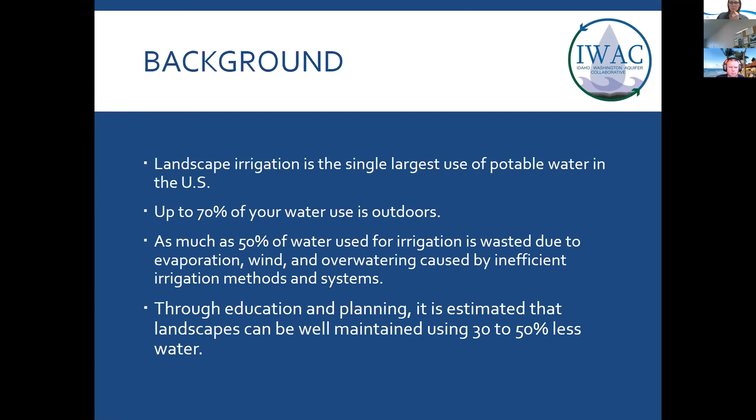There's a number of reasons that cause these green donuts, but primarily inefficient design or inefficient use of heads. Ideally, you want heads to spray head to head so you don't end up having these green donuts with dry spots in between, because what water managers will do is just go out and crank up the clock timer to try to keep those dry spots green.

And regardless of how much you punch the up button on that clock timer, if your system is incapable of reaching those dry areas, you're not going to get green. So just some very illustrative examples of what we see here. Plugging of heads or pressure issues can also contribute to these green donut features.

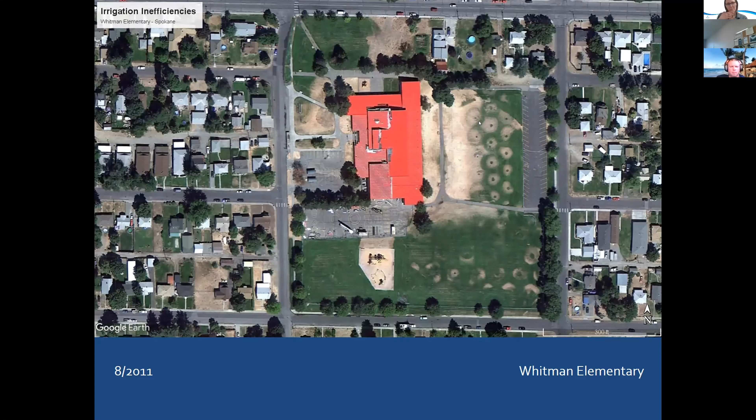Whitman Elementary School in Spokane. This landscape's got very good efficiency in the bottom left-hand corner, moderate efficiency in the bottom right-hand corner, but in the center up by the red roof school it's just totally brown. So I don't know if those zones are just not working, or, in particular between that and the parking lot, half of it's working with green and brown donuts and the other half's totally dead. So these are some of the things we're talking about in terms of not just system inefficiency and design, but also system maintenance and upkeep.

So what are some of the inefficiencies from design? Some of these I'd already pointed out in the photographs, but proper head spacing: ideally they're designed to be placed so they spray head to head and at proper distances, as well as head selection. You want to put heads where they're not going to get blocked, and this isn't always possible, but you don't want them blocked by fences, light posts, etc.

Proper head height can contribute to some of these brown and green donuts. If you haven't got the proper head height and they're buried down, you're going to see that very distinct green close to the head, but then a space of brown before it gets to the green part of the donut.

Proper head application. It seems intuitive, but I see it all the time where you have a 15-foot spray head in a 6-foot space and it just oversprays the area that's needed. Typically people break a head, go to Home Depot, grab one that looks like it off the shelf, and don't realize they're actually designed to spray a certain distance. So they need to select a larger or shorter spray for that distance.

Improper nozzle applications, whether you're using fine mist, large droplets, or a breakup. Like I mentioned earlier, if you don't have that breakup, it's just going to spray out of there like a stream, not get broken up, and not get to the landscape at all.

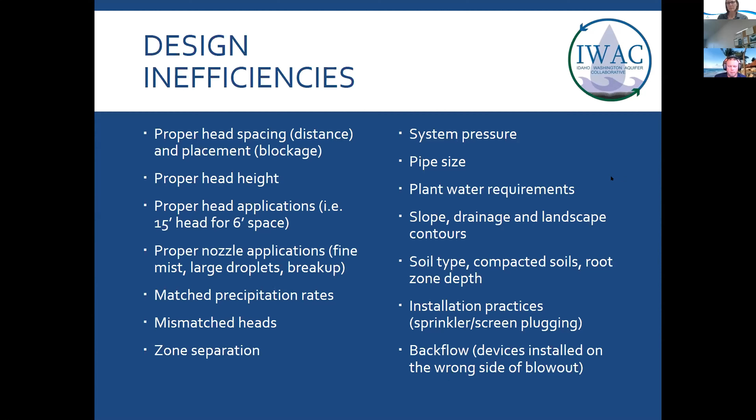Installation practices: obviously you want to keep your sprinklers and your screens free of debris when you're installing this equipment. And then also backflow devices, which we see quite frequently installed on the wrong side of the blowout or not at all.

So the maintenance inefficiencies, some of these kind of play into the other ones I just talked about, but misdirected spray: you're spraying it where it's not intended to, so you're not maintaining the degree of arc that you want on that spray. If you only want it to spray 90 degrees and it ends up spraying 180, well, that's misdirected spray.

Broken risers and heads, leaking seals on some of the sprinkler heads will really contribute to loss of volume to get the water out where you need it to. Plugged nozzles and screens, like I said, block spray. Tilted heads: a lot of times mowers will hit heads and tilt them either forward or backward. That's not going to get you the proper angle in order to achieve that head-to-head spraying that you intend. Head height I'd mentioned previously.

And then a lot of the inefficiencies that we see with regards to maintenance is we promote nighttime watering. Well, that's awesome, and that's what we should be promoting, but you also need to check your system regularly, because if it were running at 10 in the morning every day, you would probably see it running and you would be able to catch some of these maintenance inefficiencies. But the fact that we have it set at night, you don't see it.

So it's really important that you check it periodically and run it for a minute per zone to make sure that you didn't hit it with a mower and tilt the head or break the head. A lot of times they're not caught until the homeowner sees a big brown spot and asks, why is that brown? Well, you got a broken head and it's been broken for a month or more.

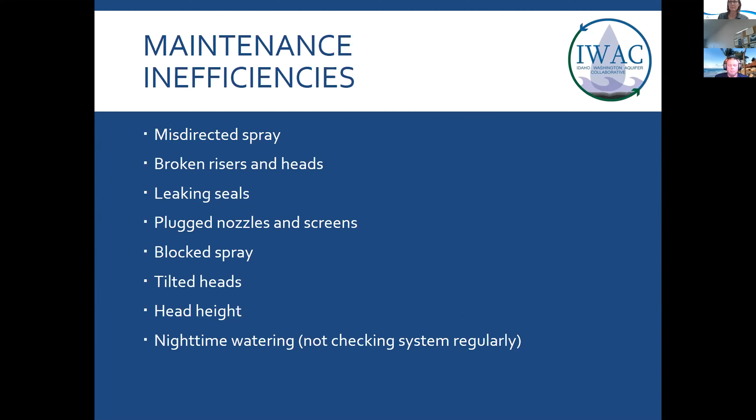And then also there's inefficiencies with regards to system operation. Set proper scheduling. Typically what we see is people water in a box. And what I mean by that is you start it in April and you end it in October and you don't ever touch the timer. So you're kind of watering in that box, you never change it.

Plant water requirements aren't like a box. The plant doesn't need a lot of water in April. It needs a lot of water in July. And plants also don't need a lot of water in October. So you really need to water more along a bell curve as opposed to in a box.

Start time is important. Obviously, you don't want to be running these systems in the heat of the day. Ideally, early morning, late evening, at night are ideal run start times. Run times are important, in particular if you can cycle soak.

And so if you want to get 30 minutes on a zone, for instance, don't just run that zone for 30 minutes because you're going to just get saturation and it's going to run off. You want to break that into cycle soak programs so you can do it into two run times of 15 minutes each on that zone, if that's what you want to get 30 minutes. That way it has a chance to get water and then soak into the roots, and then you apply a little bit more water.

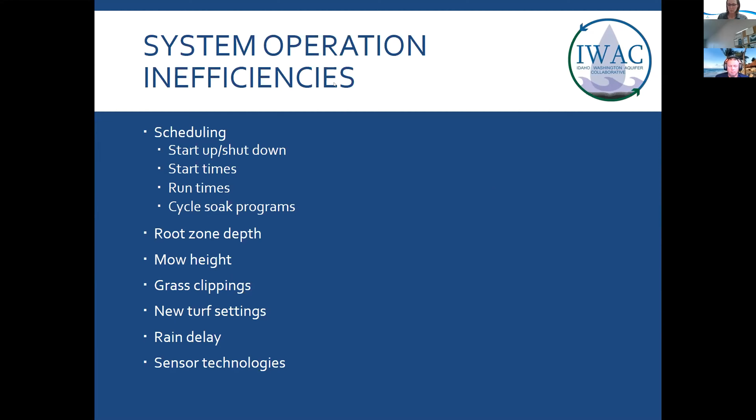Oh, I'll pause here and let the questions.

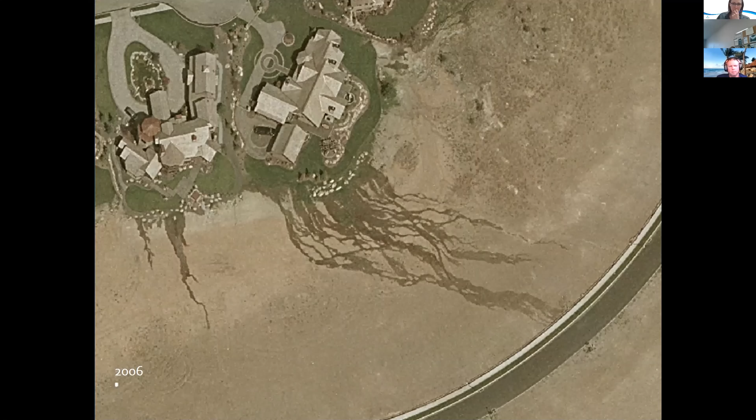Here's another excellent illustration. This is in Liberty Lake up on Legacy Ridge when they were first built in 2006, where they were irrigating these landscapes and had significant runoff from over irrigation. Broken heads that are either caught or ignored, that ended up running all the way down the parking lot and into the stormwater swale on the other side of the parking lot.

Cars are parked on top of it, dripping oil. That water carries the oil, just like stormwater. So these are things to do. Landscape managers need to correct these inefficiencies.

So I want to highlight the importance of this term called distribution uniformity. And distribution uniformity is thought of just like a percentage, kind of like a grade percentage if you were going to get one in class. Most systems are typically right around, and it's pretty poor, but it's truth, about 50% distribution uniformity.

So what that really means is if your plant, i.e. your turf, we promote this 1 inch of water a week type of education that's been out on the books for decades. But if you say we want 1 inch of water a week on our landscape and your system is only 50% efficient, well, you're going to have to irrigate that landscape and get 2 inches of water on that landscape in order to meet that requirement.

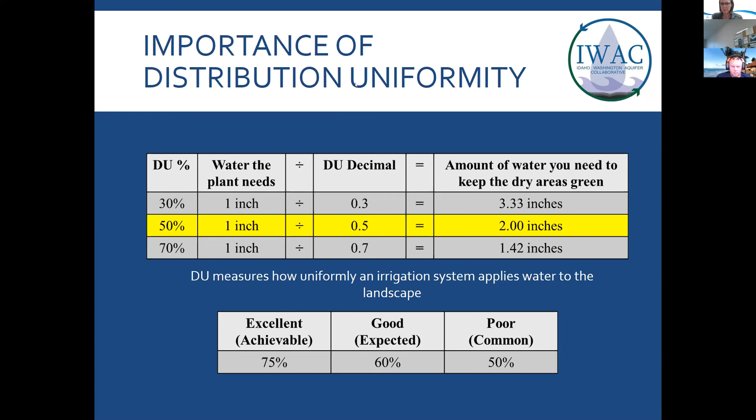But the way the distribution uniformity is measured is basically you perform an irrigation audit on the landscape, and you place cups at and between all of the irrigation heads across the landscape. And then you run the zone for a period of time, and then you measure the volume of water that is captured in these cups. And then you put that into a spreadsheet and you end up calculating distribution uniformity across that landscape.

But different types of heads have different efficiencies as well. Obviously, the most efficient type of irrigation system is a subsurface drip irrigation system. Those are 90% efficient. We also have micro irrigation systems that are 85% that have little drip emitters on them. Those are pretty common. You send this little drip emitter to the shrub that you want to water, etc. Then you have large rotors next, 70% efficient. That's why you see the golf courses have very high distribution uniformity, because they're properly designed and they're using large rotors. Small rotors are 65% efficient, and these little pop-up spray heads are 50% efficient.

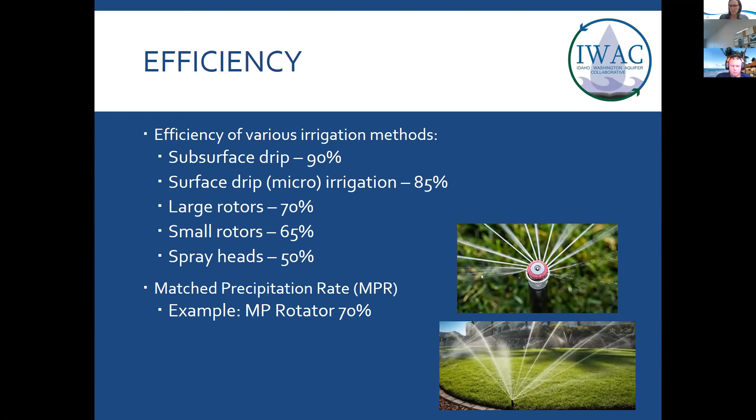So your traditional spray head, everybody's seen these. They're very susceptible to wind drift. If you have pressure issues, they really will just spray a lot of volume of water out in a hurry. The range of flow from an individual spray head goes from about 0.1 gallon per minute to just about 5.5 gallons per minute. That's per head. That's a lot of water that can be put out. The MP rotators are running anywhere from 0.17 to 1 gallon per minute. And so it's pretty easy to do the math on this.

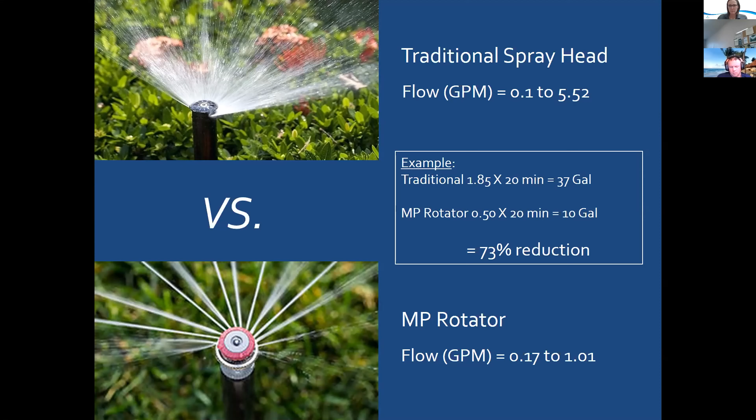And so as an example, if you have traditional spray heads that are about, let's say, 1.85 gallons per minute, and this is an actual example. These are actual spray heads that I got from Hunter's website. So if you have a spray head that's producing 1.85 gallons per minute and you're running that spray head for 20 minutes, that individual spray head is going to put out 37 gallons. Now, if you retrofit that to an MP rotator that is producing 0.5 gallon a minute, and you run that same spray head for 20 minutes, then you're only putting out 10 gallons. That's a 73% reduction in just one single head. So you can see what kind of reduction you're going to get across the landscape.

But if you start from scratch and you design using MP rotators, then you could see you have a whole lot less number of heads, which is not only important from a water conservation standpoint, but it's also important in the customer's pocketbook, because you don't have to buy so many heads, and you don't have to have as much piping and as much control valves, et cetera. I mean, the list goes on. And then you're improving distribution uniformity as well.

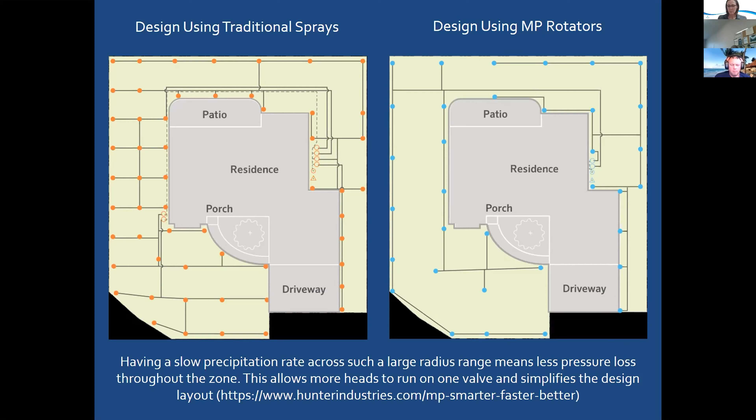So there's lots of money to be saved in designing systems right from the start, or even retrofitting systems that are already designed. And I'm going to go into that next. So I'm going to provide some examples of what we did at Liberty Lake. And some of these are a bit dated, but they're all very relevant. So this image was taken in the same month from Google Earth of August of 2011. The same landscape photos that I showed you across the SVRP aquifer.

And you could see that we have pretty decent distribution uniformity across our landscape. So we have about 2.4 acres. I audited our system in 2005. And when I audited it, our system efficiency was 44%. So we decided to implement some landscape measures. We found that we had excessive pressure. So we put little pressure reducing devices on our valves.

We matched and aligned all of our rotor heads. And by matched, I mean, we had a hodgepodge of all kinds of different heads. I had Toro, I had Rain Bird, et cetera. So I went through and put all the same heads in. And then we installed a soil sensor. So I didn't go in and dig up the whole landscape and lay new pipe. But the cost of this was about $500. And just from these retrofits, we reduced our water by 36% the next year, and we improved our distribution uniformity to 61 by just making those simple improvements.

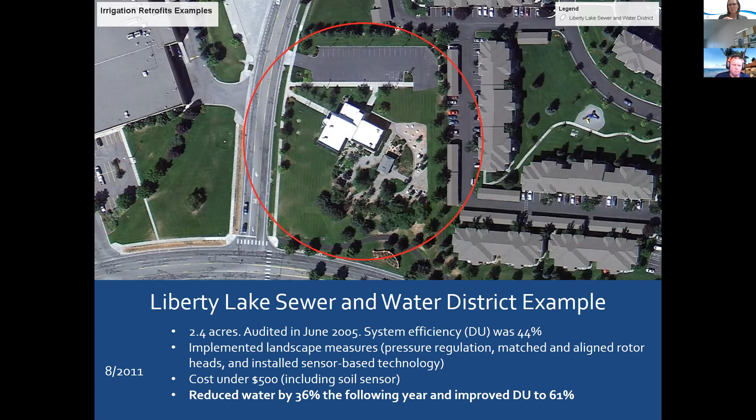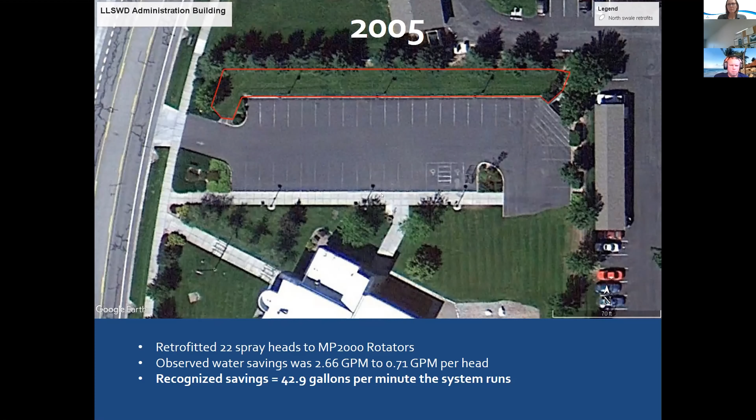Next thing that we did was our swale along the north side of our parking lot. We had 22 spray heads there. We converted those into MP rotators, MP 2000s. Each spray head was doing 2.66 gallons per minute. That was an actual from the spray head that we took out and the model that was used. The MP 2000s were producing 0.71 gallons per minute. So we saved 42.9 gallons every minute that system ran. Every minute that zone ran, we saved about 43 gallons. And that was in 2005.

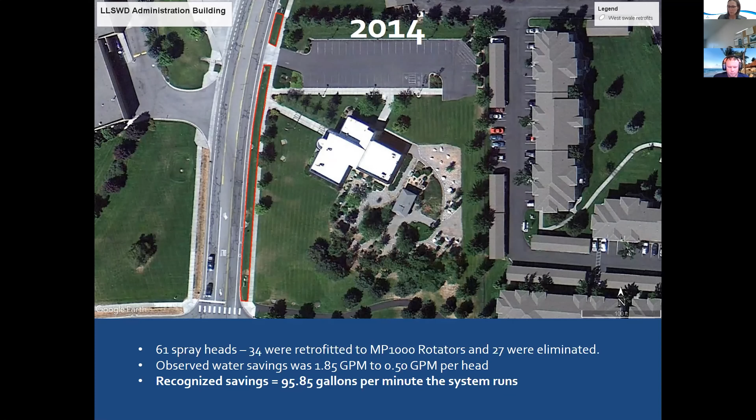We put the MP 1000s in at a half a gallon per minute, and those changes had recognized savings of 95.85 gallons per minute every minute that system ran. And you can see that it's very effective, and we have very good distribution uniformity, and we were able to achieve a lot of water savings. And so these are the concepts that I had presented to IWAC and IWAC's initiative to move forward with a design efficiency guidebook. So that concludes my presentation, and I'm not sure if you want to do questions now or later.

So Dan has a question for you. Yeah. If Dan can unmute. So, you talked a lot about water resources, and of course my internet connection is telling me it's unstable. So hopefully I'll get this out.

Can you talk a little bit, Jay, about how the standards help with water quality? With water quality? Yes. Yeah, so it plays into some of that runoff I talked about with cars being parked on there, that is contributing to stormwater runoff and additional pollutants. And if you just fertilized your lawn, then it's going to carry additional fertilizer along with it. And obviously a lot of people, when they do fertilize their lawn, over fertilize onto the sidewalks and the parking lot. And so if you have overspray, it can wash that fertilizer off into places that you don't want.

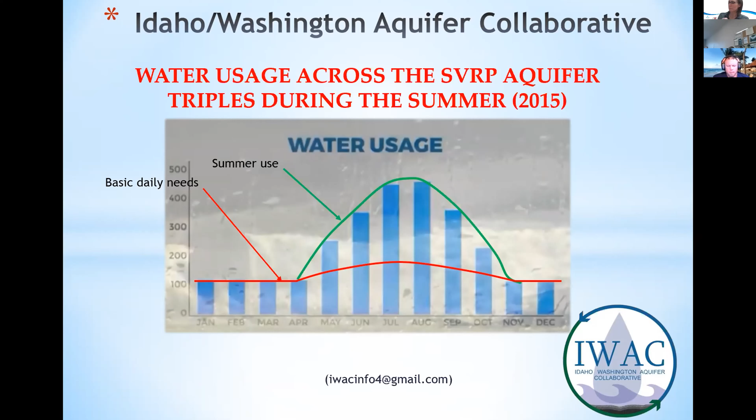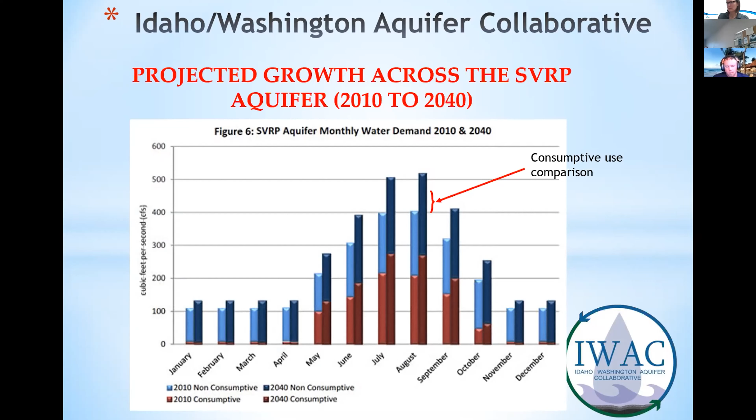I happened upon this graph a few weeks ago. This is projected growth across the SVRP from 2010 to 2040. And as you'll notice, the red or maroon in that is consumptive use, and the blues are non-consumptive use. Look how much they're expected to grow in summertime over the next 20 years. That's, as I pointed out, simply not sustainable. We need to be cognizant of what's going on there and see what we can do to protect that supply for beyond 2040. Next slide, please.

So here's a graph we put together, kind of looking at what if we could achieve a 30% reduction. So here you can see in blue what's been used in Spokane County itself, and 30% reduction would be in red. If you figure that out, City of Coeur d'Alene uses about 4.4 billion gallons a year. The savings in this over one summer cycle could supply the city of Coeur d'Alene for 3 years. That's a significant amount of water that we could reduce and save. So, next slide, please.

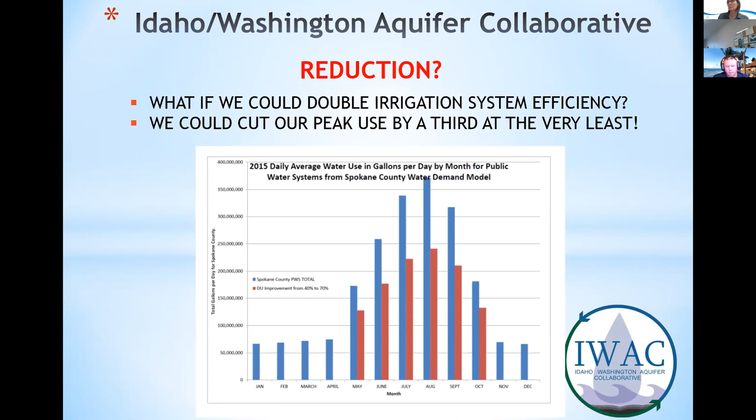We all have this issue where we're working with plan development. Most of our planning requirements, planning and zoning requires a certain percentage of green space, typically around 10%. Well, unfortunately, turf is the least expensive and easiest to maintain for developers to install. So there's not really any incentive for them to do anything more efficient and less water hungry. So this is what we're seeing. So we've got to devise a way to look at reducing turf. Next slide, please.

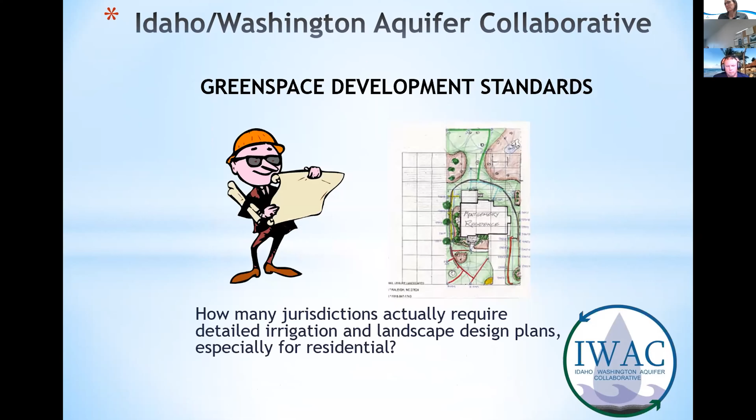As I mentioned, green space development standards. How many jurisdictions actually require detailed irrigation and landscape design plans? As we were doing a little bit of research on that, very few. A lot of them require it for commercial, but none for residential, and residential makes up the majority of our overall water use. Next slide, please.

What are our expectations? No, we don't want desert. You know, we like our green space. Our water is relatively inexpensive, but we need to look at methods to conserve. So there are other options, more efficient irrigation systems, as BJ pointed out, especially with the MP rotators, and more efficient landscapes. We'll talk about xeriscape and native landscaping in a moment here. Next slide, please.

We need to change the culture. We need to think about efficiency and sustainability long-term over our aquifer. And we as water purveyors and operators, that's our job. You know, we need to promote that. So that's kind of why we're here today, to talk to you folks about that, to get you on board and start changing that culture. Next slide, please.

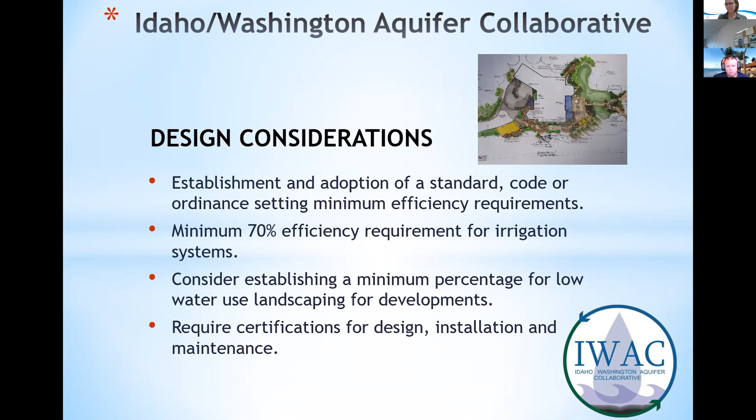BJ talked a little bit about design considerations, maybe establishing a minimum 70% efficiency requirement for irrigation systems. Consider a minimum percentage of low water use landscapes for new developments or retrofitted developments. We should be looking at requiring certifications for design, installation, and maintenance. A lot of the residential systems are installed by high school kids hired by irrigation contractors, and they have no concept of what they're doing other than he tells them, pencils out something, and sends them out there to install it. So, next slide, please.

Repairs and upgrades. Upgrades do not have to cost a fortune, as BJ mentioned. You may be able to reduce the number of heads by installing the new MP rotators, and they can be relatively quick and easy and inexpensive to do, and it will drastically improve your water efficiency and probably cost you less water in the long run. Next slide, please.

As BJ pointed out, proper annual maintenance. Simple adjustments can have a significant effect on your irrigation performance, specifically by not watering the sidewalks or the street, watering only the grass areas, and making sure that everything's working and not broken heads and stuff like that. So next slide, please.

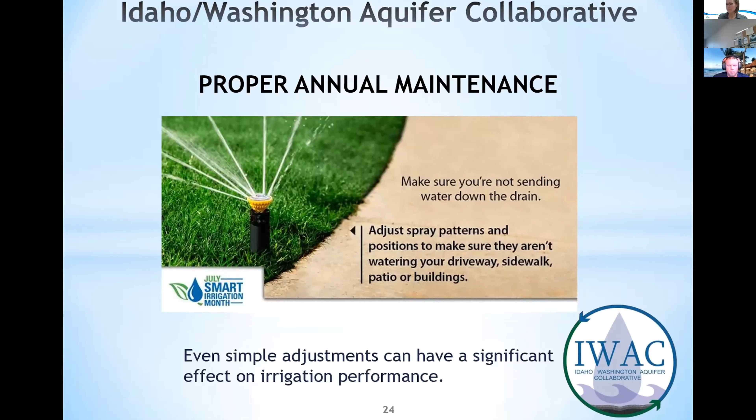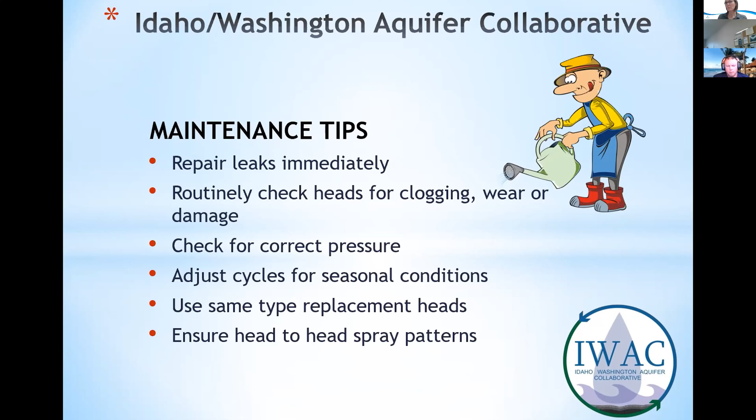Repair leaks immediately. Routinely check for clogged and worn, damaged heads. Check for correct pressure. And BJ talked a little bit about this. Too much pressure is just as bad as not enough pressure on these. They're designed to run in a certain pressure range. But what happens with the consumer that has too many heads on his zone, so it's not watering properly? What do they do? They add a booster pump and increase that pressure. Increasing that pressure increases atomization of the water, providing water that can be easily carried off by the wind. So adjust cycles seasonally and use the same type replacement heads. Next slide, please.

Consider taller grass heights. Ever walk out in the field in the summer of tall grass and your feet still get wet? Well, the taller the grass, the more it retains that water near the surface. So consider that. Make sure you prune shrubs and trees to allow better spray patterns. BJ mentioned the problems with runoff on slopes, so frequent shorter duration cycles help with that. I fight with Winco over here because we have a river running down the street in the summer from all of their slopes.

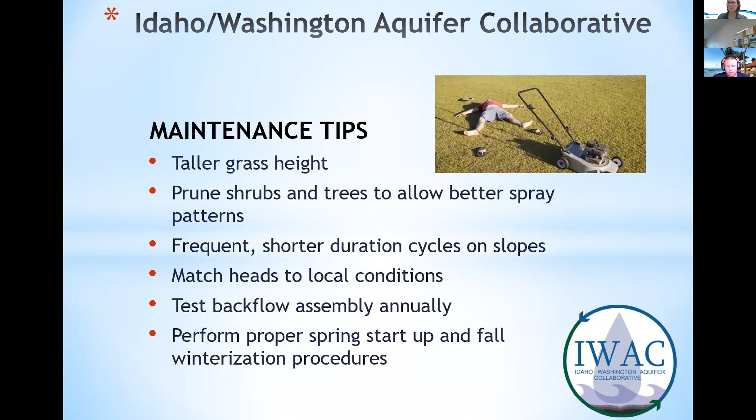Match heads to local conditions and test that backflow assembly annually. Make sure it functions properly. Perform proper spring startup and fall winterization procedures. Next slide, please.

Next slide. Terry, yes. I might mention here, on a lot of the audits that I perform, turf grass and residential lawns, the root zone depth hardly ever exceeds 4 inches. And so this is a very important consideration, because if you have a very shallow root zone depth, because you're not stressing that plant out to send its roots any deeper, and then you're watering 12 inches, all that other water below that's wasted. All right, thank you, Jay. Yes, that's a very good point.

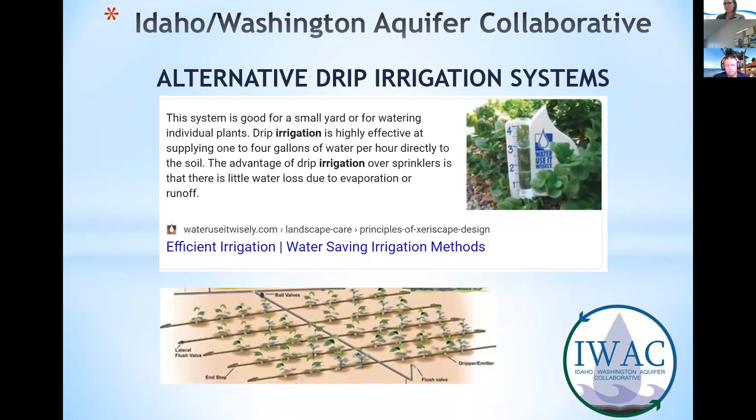So next slide, please. Looks like we're running short on time, so we'll get what we can. Next slide, Michelle. Okay. Jay pointed out the drip irrigation systems are highly efficient and fairly easy to install. Next slide, please.

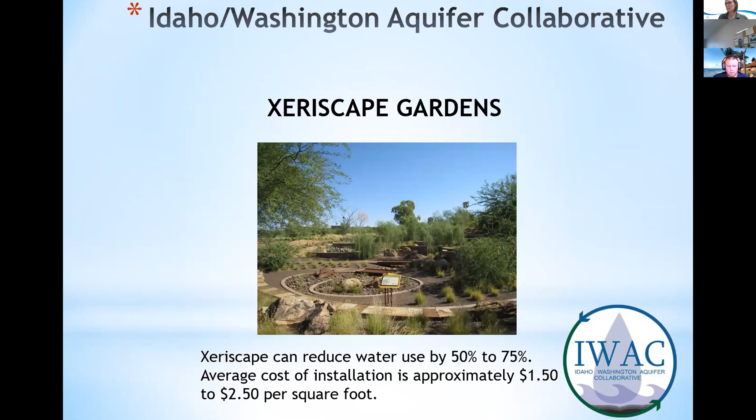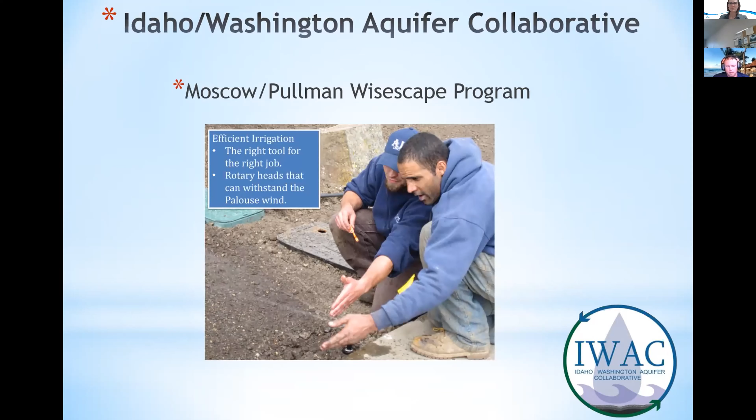Showing them installing the MP rotator heads. They have a lot of constant wind there, so they were challenged with trying to find a head that would withstand the Palouse winds. Next slide.

Where are we at for time on this, Dan? I think we're pretty well there, Terry. All right. Well, instead of getting into some of these other things where we have parking strips and buffers, we'll just go ahead and open it up for any other questions.